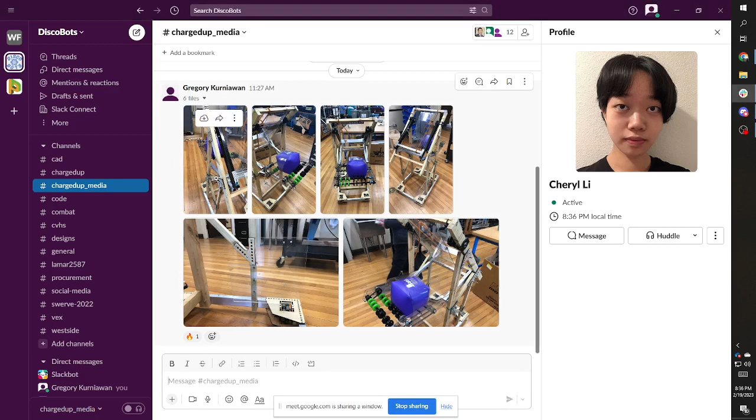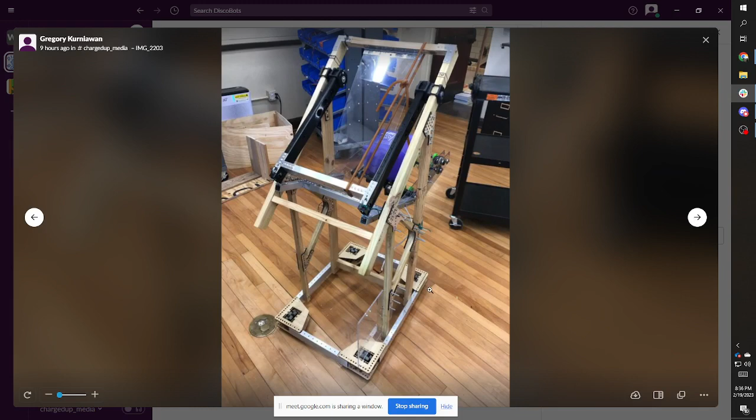Our dummy swerve drive chassis has come in, it's been very effective, and we've pretty much built a fully functional prototype out of wood, and we've tested it. It does reach the top scoring area for both cubes and cones. So that's good. The arm, we're still figuring out the hard stop, that's just kind of weird to figure out.

Probably, but I feel like that's not a super big deal. Otherwise though, I think at least the geometry works, we know that works now. And then we've started producing the superstructure for our V1, so all the metal superstructure has been cut.

For the prototype, the arm when it's in still sits out of the frame perimeter, so we're gonna move it, we're gonna change the drivetrain - I think that's our consensus. That leads in well to Sid. So this is a pretty big change, changing the drivetrain dimensions, but it also presents a great opportunity for us to clean up our CAD because that is kind of a mess at the moment.

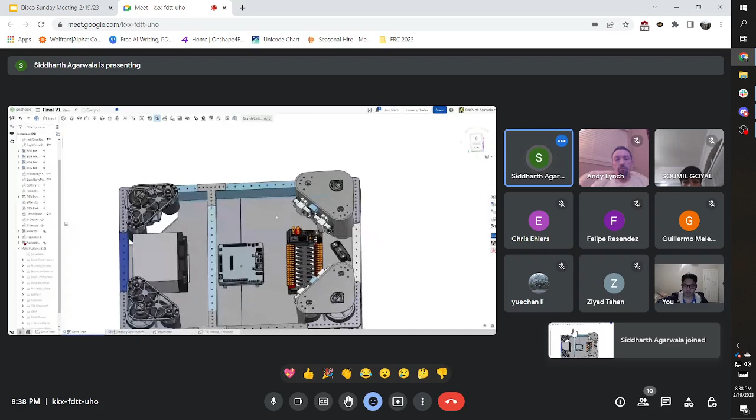At the moment I've been working on here - let me just share my screen. I've been working on the drivetrain with Greg. We have our 2-part belly pan, we're planning on doing steel, quarter-inch steel, and then adding in extra 1/8-inch steel if we have extra weight, and that can be removable. We've kind of laid out our electronics, and some of the people at Westside CADed up this swerve module electronics holder.

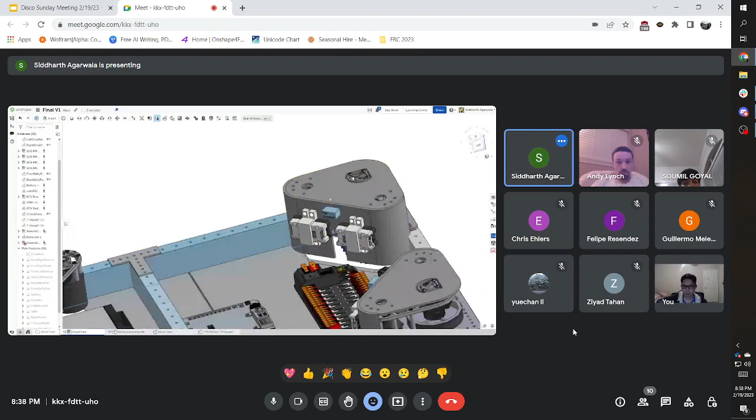And they've been 3D printing those. We still have to figure out something else for this side because the battery would interfere with that.

But on the bright side, that's done. Like Greg said, we're still cleaning up our CAD. So we'll be adding the superstructure to this.

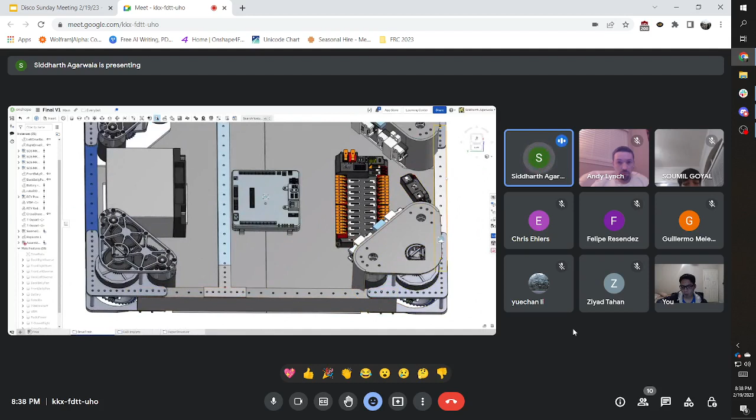But the especially nice thing is we have all of our drive rails made cleaner, so it's faster to load on other computers that aren't able to process as fast. In that same vein, I recommend making some models of the Rio and the PDH that are just blocks, so everything keeps loading, because I know electronics parts are going to slow things way down if you start using the high fidelity stuff. All right, I think that should be a pretty quick change that we can do.

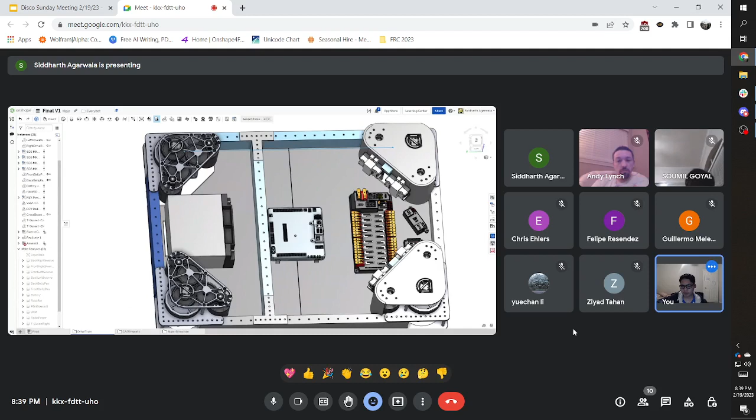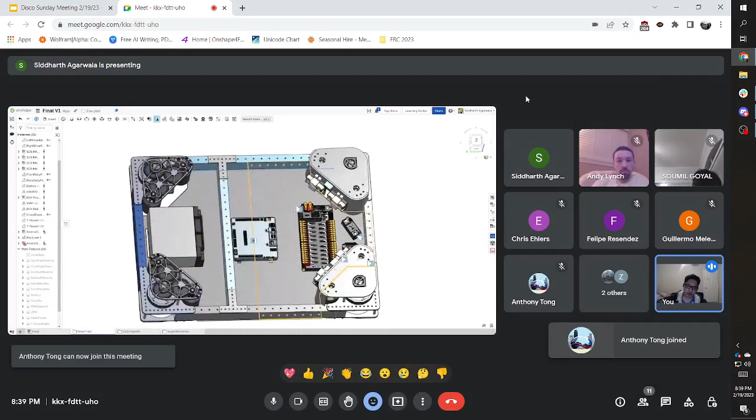The idea here, at least for me, for making this new CAD thing was basically to have it build out the same as we have it right now. So, for example, before on our old CAD, it was made out of MAXTube, right? But the superstructure we made was out of normal 1/16 tubing. So the idea was, I'm gonna make it as accurate as possible to what we have built, I guess. That's the idea.

Yeah. It's a little bit of work to do.

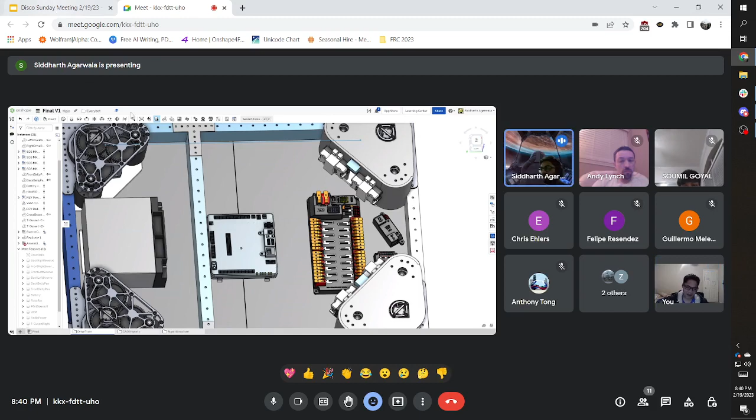I think we have tomorrow off, Sid. Yeah, so we'll be probably putting an update out for the CAD tomorrow afternoonish. Yeah, since we have Monday off, I think grinding this thing into mostly complete is really important, so when we start cutting things, we feel really confident that we're not going to make a mistake, because we've already kind of thought about the ground intake, the Everybot arm, all the pieces, as full CAD as we can get. So.

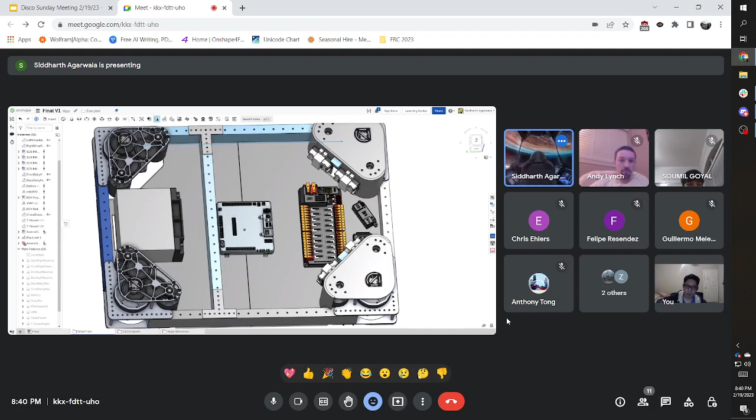Yeah, one thing I will say about that is we've done some stuff about the intake, and I think that leads into Soumil and Guillermo pretty well.

I don't think Soumil. Do you want to talk or? Yeah, I can. Let's go.

Excellent, so I'm going to hold on, let me finish loading this. What's it called, Google Meet, because it's about to share my screen. Let me know when you can see it. Okay, I think I just lost my privilege to share. It's uh, gray. You should have it, I got it back. I got it back, okay, okay, nice. Let me know when you can see the CAD software. Is it visible? No, not yet. Oh. Uh, let me restart that. Okay. I think yeah, it's no, this loaded, share screen is great, oh, you're presenting now. Oh, very nice, okay, that is good then. So, right, do you see the one like is colorful? It's like gray and red and orange. Yes, there we go, like, do you see my mouse moving? Yes, okay, excellent.

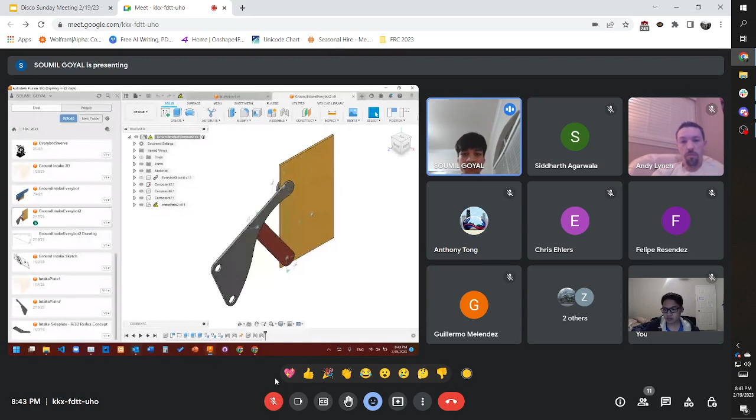So on Saturday, we were able to laser cut this part over here, and also on Friday and Saturday we were able to create some rough draft of these linkage points to put on the robot. And the good news is that when we tested the linkage itself, it works quite good. It goes down to the floor, and then when you move it back up, it will go back behind the frame perimeter and it will be in size limit. So that's great. And also, one of the notes is that Siddharth was talking about how the drive base has to be increased in size.

Luckily our ground intake should not be affected much by it, because if they increase it by 2 inches, the way the geometry is right now is that it doesn't rely on anything else in the robot, so everything can just be shifted 2 inches without any problem. And that's one of the good news.

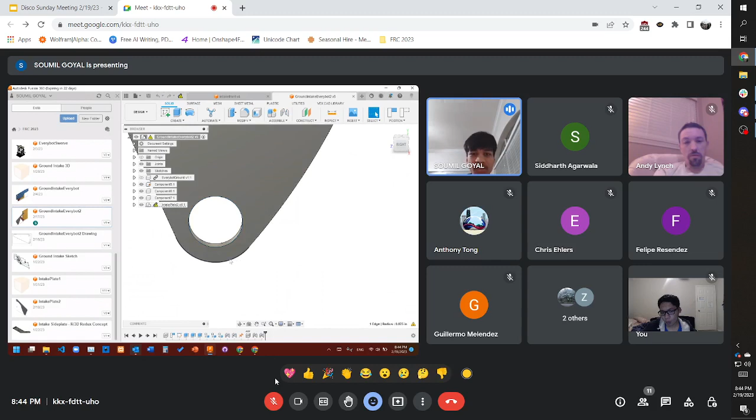Now, this did have a few problems. Firstly, this joint was a bit too close to this line, so whenever there was a bit of load on it, it seemed kind of bad. And then also this bearing place, because I don't know if you recall from way back, but when I was presenting the first drafts of the intake, I was mentioning how a good bottom roller is one of the keys to picking up a cone. And to bring this down, it was touching too close to here. So even though it was a wood prototype and wood is kind of weak, it still cracked and it still has a bit of worry and consequence, right?

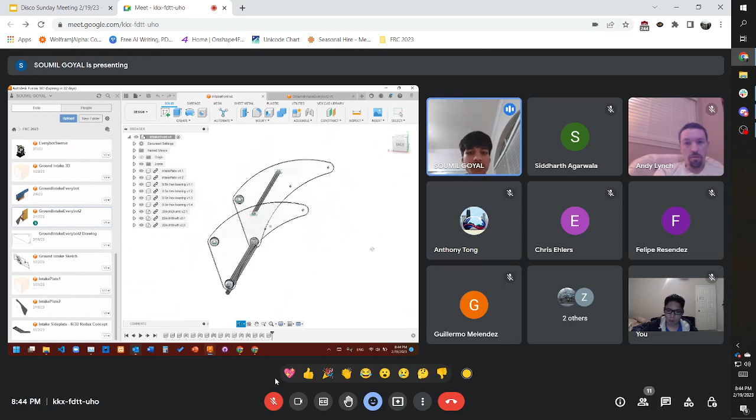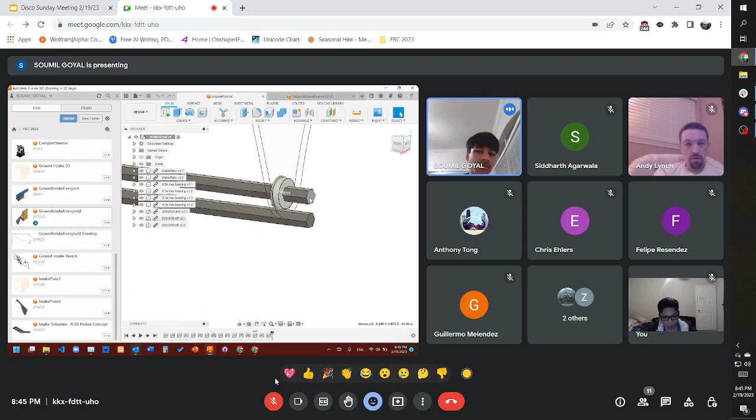So on plastic, it would work better when we cut that out, but there are a few other solutions we found. This is a more finalized version. I found a solution inspired by one of our previous Disco Bots robots, where you take a small Omni wheel and put it on the outside, and it's free spinning there. The good part is that the intake's edge won't take the load—instead there'll be an Omni wheel on this shaft taking the load. You drill a circular hole through it so it's free spinning on the shaft and doesn't affect the actual intaking.

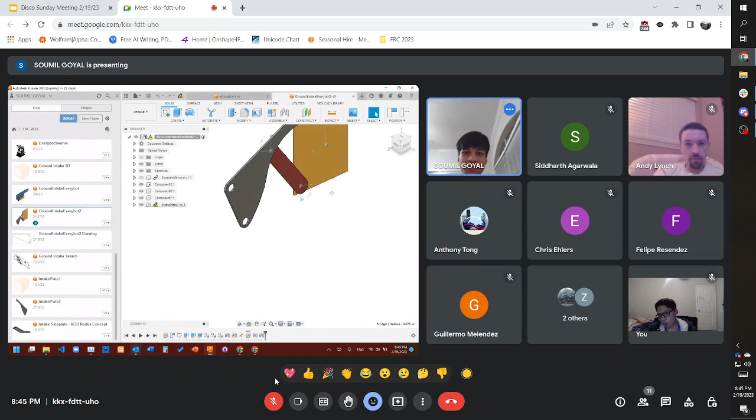That's one of the things. Next, the sketch geometry was slightly changed so there could be more distance between the actual joint and this, and same for the back. So you can see it now looks very sleek, elegant, and futuristic. This one also looked kind of good, but I think the other one looks better.

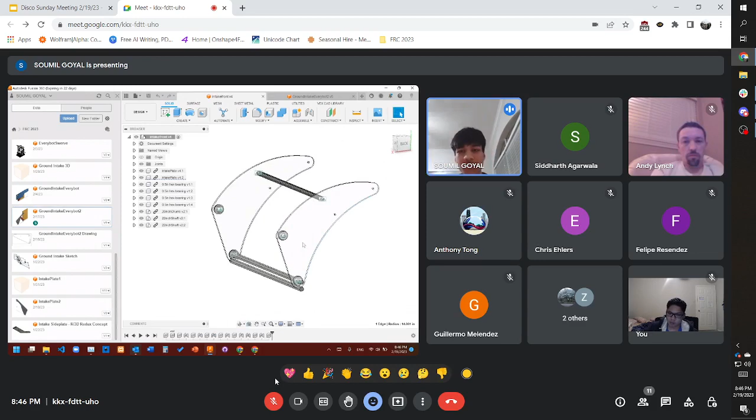Next, since this intake is going to get beaten up so much by ourselves and by the other team, we should probably make at least a few versions of this. By making multiple versions—at least two—we'd get a chance to experiment a little between one and two. One could be the reliable basic version, and the other could have different features like more compliance, more rigidity, or even a launcher.

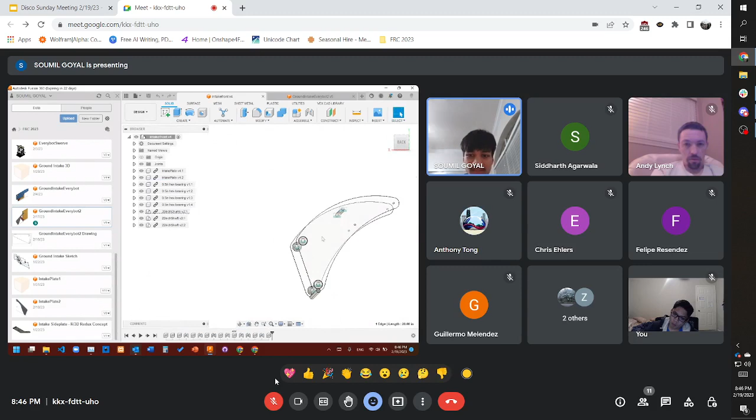So on this intake there's the extra feature of this type of hump. Over here I'm able to put some tubes along the width of it to make it more stable, because I can't put any structural stuff here—that's where the cube goes—and I can't put it here because that's where the bumper would be. So up here we have a lot of space actually. If you look at the Everybot, that volume isn't currently being used by anything, so we have a lot of room to build up.

Sam messaged me yesterday about some kind of launching mechanism he saw from other teams, which is a pretty cool idea we can try to implement since we're lucky to have that space to build upon. Other than that, the rest of the linkage geometry is staying the same, and hopefully it works even better. Is there any questions about the ground intake or any other stuff?

Don't the wheels need to be counter rotating, right, for the intaking? Am I getting that right? The wheels on the bar, the actual intaking wheels, the flex wheels, the ones that spin with the axle—correct, yes, those rotate counter to each other.

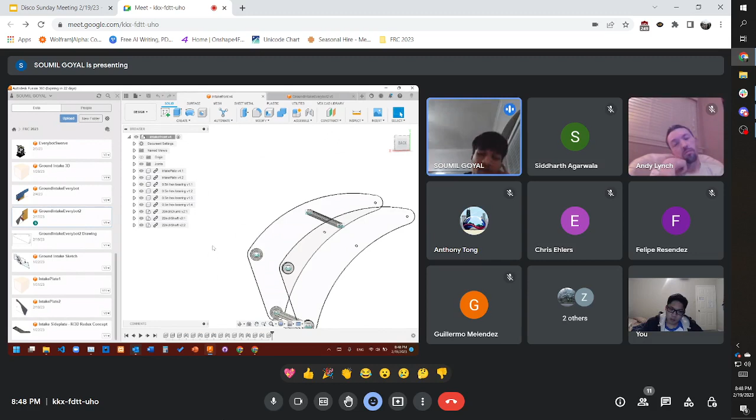The solution we found is that, let's say the motor was mounted over here—that motor would be directly chained to this, and geared to that. What's the effect? When two gears are contacting each other, they spin in opposite directions. So if the motor was spinning clockwise, this would spin counterclockwise, and since the motor is chained to this, it would also spin clockwise. This is clockwise, this is counterclockwise, and therefore we achieve opposite motion with the least amount of moving parts—one gear system and one chain system, all run by one motor.

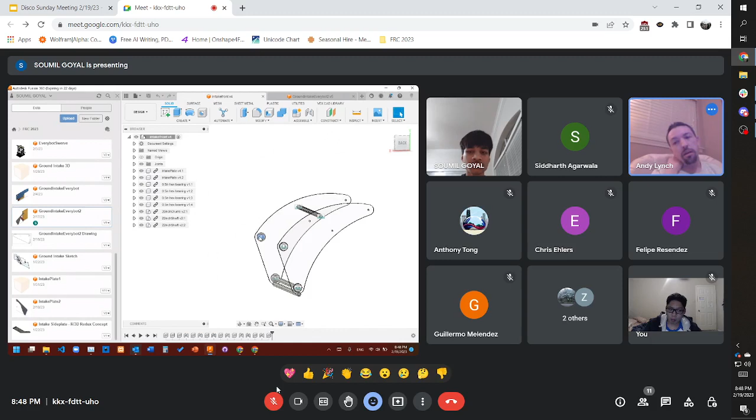I think if you look at the intake for the Everybot, you might have to add a protection plate where the motor gears are coming out—basically just a cover to protect all those gears. And if there's a pulley running between there, or if we go back to chain—either pulley or chain—you're going to have to think about that distance, because with pulleys you have to be very exact on distances, and chain you have to be pretty close to exact. Pulleys would be nice.

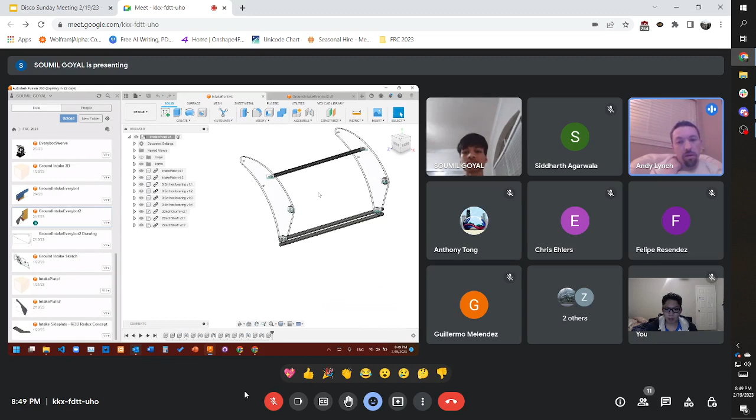You're gonna have to do some calculations to get the pulley spacing just right. Every bot intake is probably a good example - maybe look at some distances there and see what they're using, because we know we have some pulleys that work for that. There's a calculator you can use that'll give you exact teeth - I'll have to dig around to find it. You put in a distance and it'll tell you how long of a belt you'll need for that calculation.

I would start adding all that detail into your stuff, Soumil. So when you make this on the laser cutter, it's gonna have the holes for the motor mount, pretty much all the holes the final version's going to have. We could throw a bearing in there or a motor and test the pulley distance, confirm it's perfect straight from the laser cutter, and then start making the real one out of Lexan or whatnot, without wasting a bunch of time.

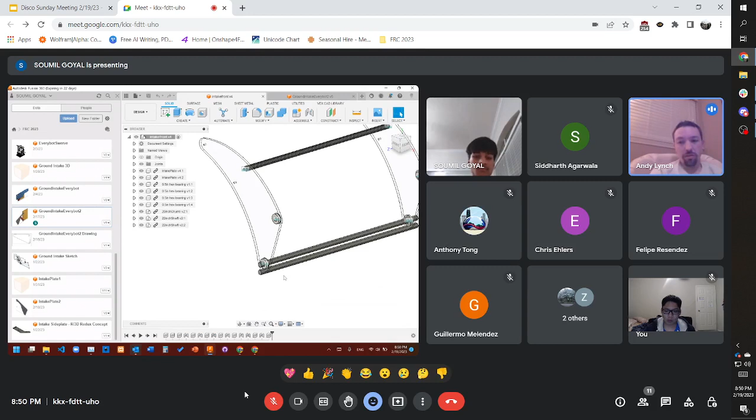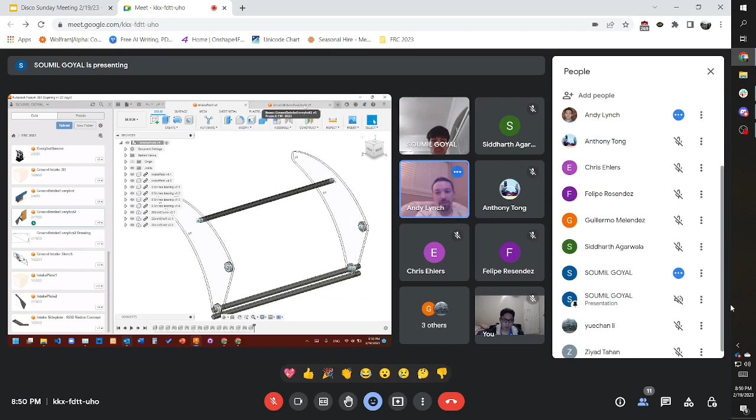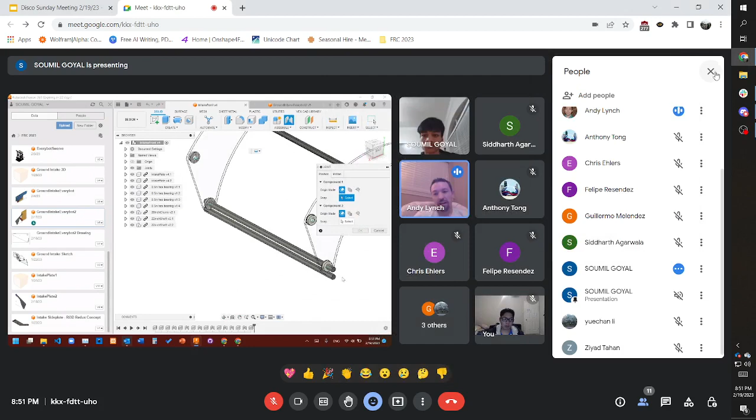I think you need to get this as accurate as possible tomorrow, so on Tuesday when you're printing it, hopefully it's really on point so we don't have to do many other iterations - we can at least make a working version from your laser cut model. I know Sid's got a lot of work to do, and I'm happy to look over screenshots as you guys progress, but we're going to need to get as detailed as possible by Monday so we can make substantial progress this week, and not have to keep searching for CAD updates.

If you get stuck or need help, first I'd hand this model you currently have over to Sid so he can throw it into his full CAD step of this plate, and whatever else you can provide him - maybe the geometry of your linkage and whatnot. You're obviously going to have to put a lot of time into this - these ground intake plates are going to be really complex.

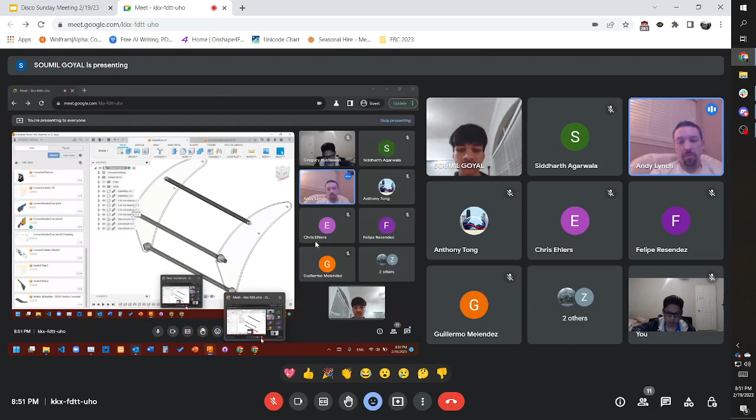The linkage stuff, I think we'll work on - it's tricky, but we might want to split up. Greg, what are you working on? Do you want to help Soumil with this a little bit? Sure, I've been making the things that showed with them. I think it might be beneficial if you work on the mechanism that lifts this ground intake up and down - the linkage. He's got the linkage geometry, he needs the physical motor system for that - that's going to lift it up and down.

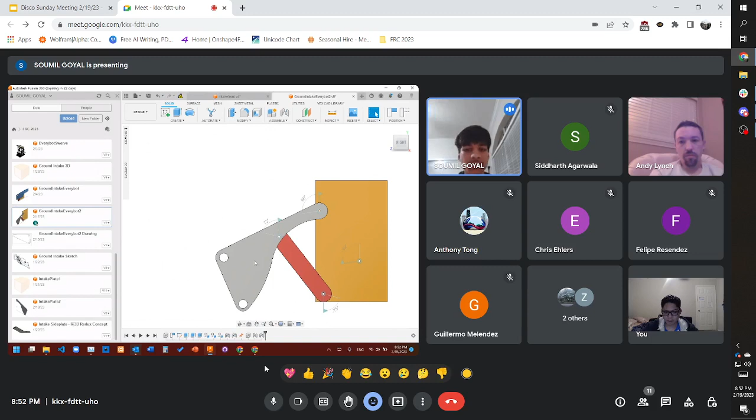Siddharth currently has this CAD file I'm showing you right now - all the geometry is the same. The only difference is this shape at the bottom, which shouldn't affect how it goes up and down. That's a cool plan - I think that'll take the load off because Soumil's got a lot of work to make these plates really accurate and stable, and then somebody can just worry about the motor mechanism that actually lifts it up and down.

Does that make sense? Yeah, that works. I think that'll help him a lot, so he can just focus on the plate itself, because there's a lot going on there, and we need to get it all in the CAD - I think that's a big chunk of work. Any other concerns people have?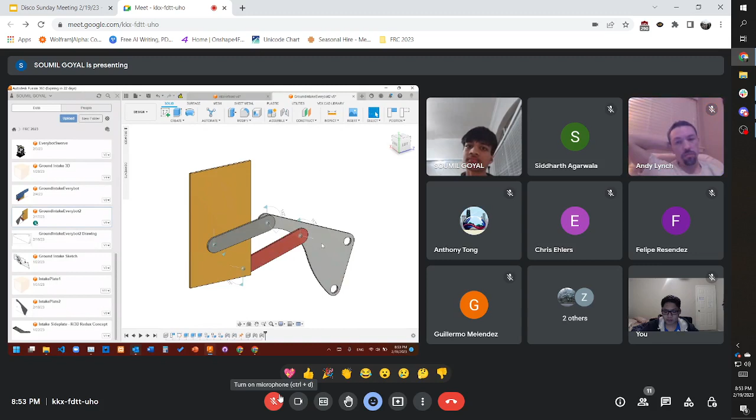If not, let's move on to our next speaker. Cheryl, you said you wanted to talk, right? Yeah, so about the Swerve Drive, I looked at the code.

I came up with three approaches on how to solve this problem. The first one is trying to get the library we already have, the one that doesn't go in a straight line, to work. The second approach is completely writing another project. And the third one is trying to get YAGSL, that library, to work. I tried all three of them. Let me share my screen for the first one.

Alright, so it's loading. The first problem is that the version is 2022, so it's not compatible with 2023.

When I was trying to get it to build, I believe these weren't working. So I did a little research, and it says they deleted one of the classes, so it's not going to build at all. I also tried writing a new project. I got it to run on the robot, but I think I'm still having issues with the swerve drive kinematics and stuff, so it doesn't work.